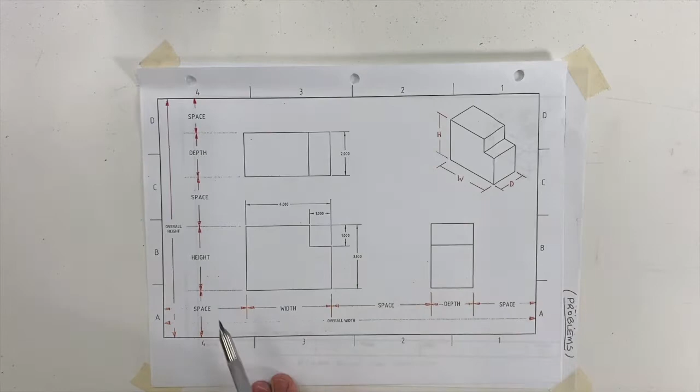To center a drawing, you first have to think about the overall size of this drawing, and then how it's going to be oriented in an orthographic or multi-view drawing. Remember, we have the front view, the right side view, and the top view. So we have to consider its width and depth in horizontal orientation, and its height and depth in vertical orientation or spacing. There's also a space on the left, in between the views, and to the right, as well as a space below, in the middle, and to the top. So it's first good to understand what size of a drawing space you have to work within.

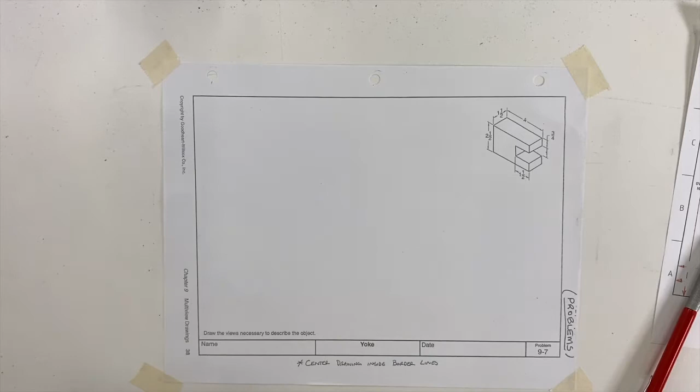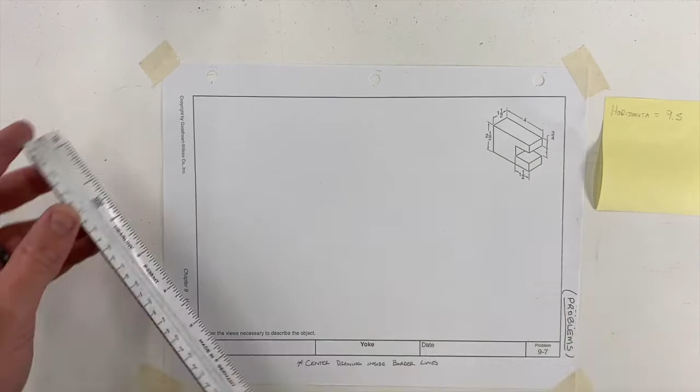Take a measurement, that way you can subtract the remainder to figure out what you have to work with. So we have 9 5/8, I'm going to round to 9 1/2. So our horizontal is 9.5. Our vertical space, we're looking at between the border lines, so basically the space we have to draw within, is 6 1/2.

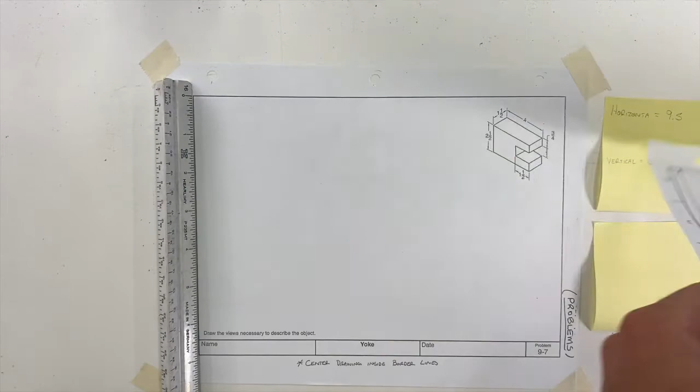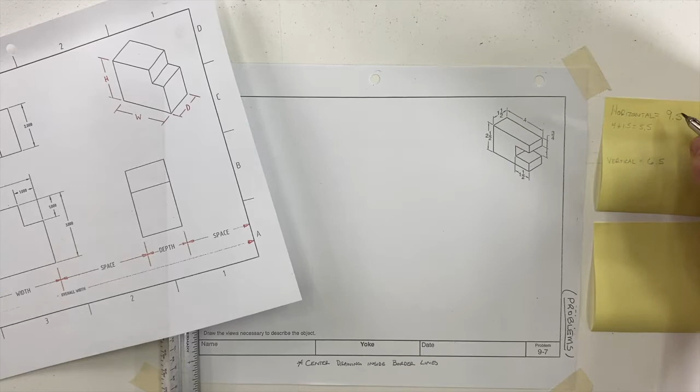Then we have to consider what the space is that we are working with in either orientation or direction. We take the width and the depth and add them together to understand what we're dealing with for the horizontal. The width of our object is 4, plus the depth, which is 1.5, giving us 5.5. So we subtract 5.5 from the 9.5. The halves cancel each other out, and we're left with 4 inches.

We're going to do the same thing for vertical. We're dealing with the height of the object and the depth of the object. So we take the height, which is 2.5, we add the depth, which is 1.5, giving us 4. So we subtract 4 from 6.5, and we're left with 2.5.

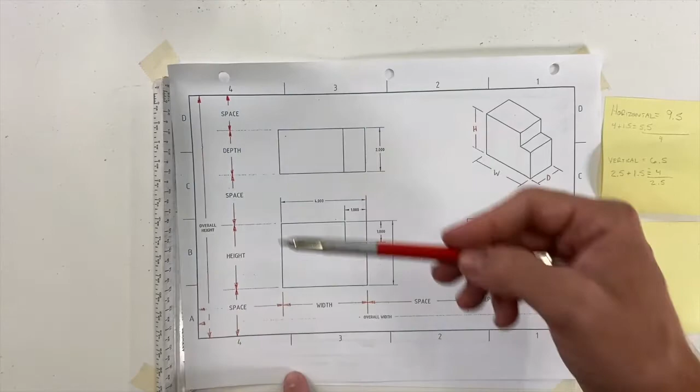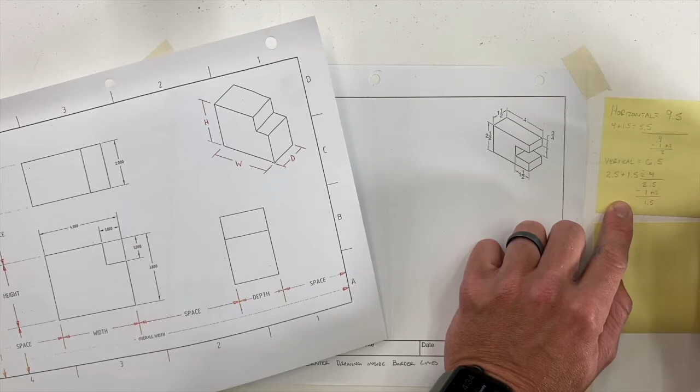These remainders are going to be divvied up with the spaces. I'm going to make this easy and just make the middle space 1 inch. So subtract that 1 inch, we'll call that the middle space, and we are left with a remainder of 3 inches for the horizontal distance, and we're left with 1.5 for the vertical. So this is going to be a 1, and this is going to be a 1.

The remainder is then divided by 2, for the top and the bottom, and the left and the right. So I'm going to divide both of these by 2, and that will give me my spaces on either end. So this will be 1.5, and this will be 0.75.

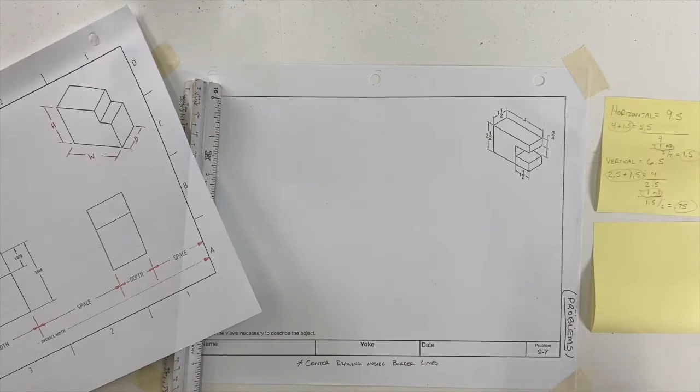So we have these two numbers. All the numbers that are important right now: the width of our object is 4, the height of our object is 2.5, and the depth of our object is 1.5. Now let's just talk about if we're laying out this thing in a horizontal format.

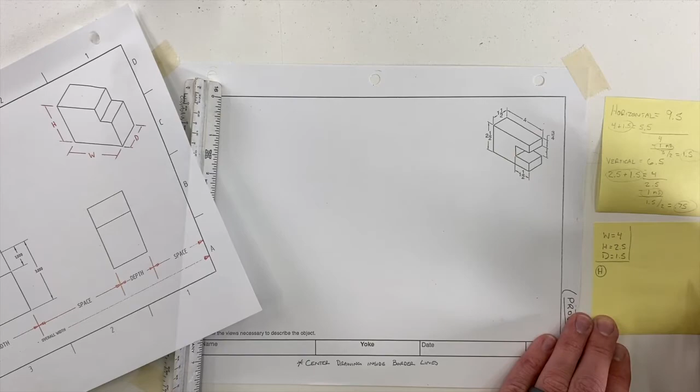So this is horizontal. We have the width, so let's break it down this way. We first have the space, which, looking at the horizontal spacing, my first space is going to be 1.5. Then I have this width, which is 4. Then I have the middle space, which I said let's make easy and make it 1. Then we have the depth, which is 1.5. And then we have the last space again, which should be symmetrical, so it's another 1.5. If you tally that up, it should equal this horizontal spacing, which it does, 9.5.

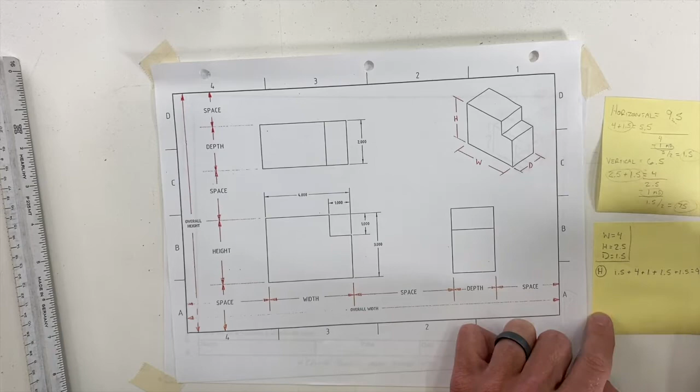Alright, so now let's do the vertical. We're dealing with the first space, the height, the middle space, the depth, and the other space on the top. So first, the space we decided, or that we found by subtraction and division, is 0.75. Then we add the height, which is 2.5.

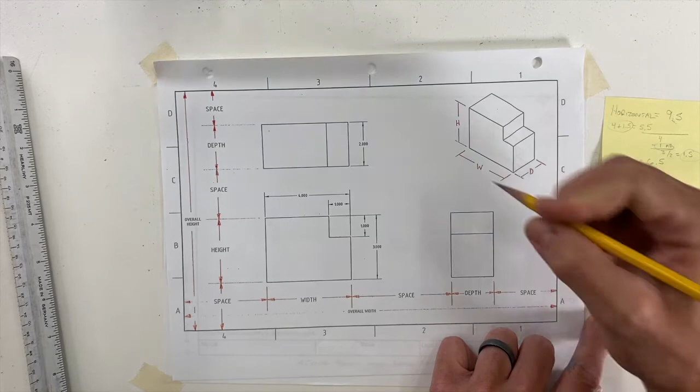Then we add the middle space, which is 1. Then we're looking at the depth, which is 1.5. And then the top space, which again is 0.75, and that should equal our vertical space right here, 6.5. So that's an easy way to check our work.

So when laying out our drawing, just like so, I know exactly where everything should be. So I'm going to treat this as if it were just a cube. We can ignore the little cutout for now, and we'll just lay out what's called the envelope.

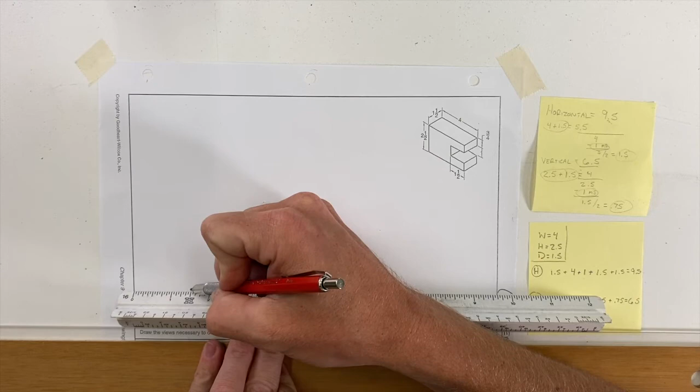All right, so first, just horizontal spacing. I'm just going to give myself some tick marks. First is 1.5. Then our object is 4, we can see it here, 4 inches. Then we have that 1 inch space. And then we have the depth, which is 1.5. And then we have the right side, which is 1.5, which adds up. You'll notice it's an eighth off because I rounded the 9 and 5/8.

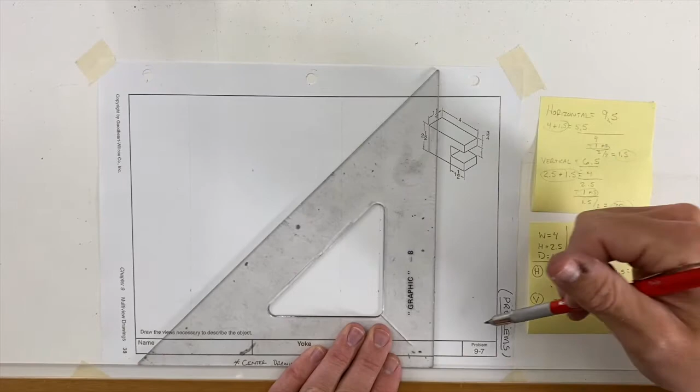All right, so from here, I can block in my vertical measurements. Now we need to measure our vertical spacing. So first we have a 0.75, then we have 2.5 for the height, then we have a 1 inch space, just jump to 3.5, and the depth, 1.5. And we should be left with the top space, which is 0.75.

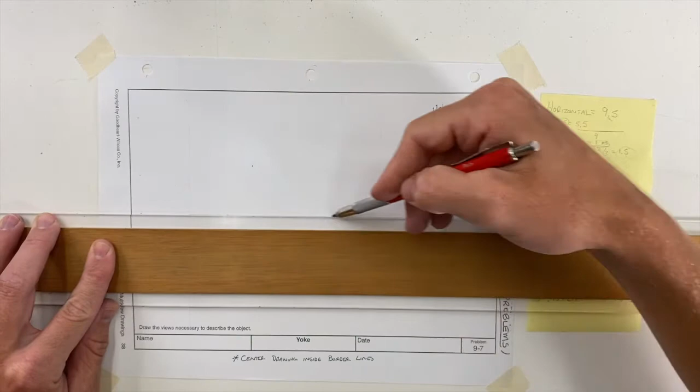So now I can just block in all the horizontal lines. And the reason I'm not drawing across the whole sheet is because now that I know where the horizontal lines go, I basically get 3 blocks here. So my front view, right side view, top view. And now I can start actually drawing this out.

So if I want to draw them as object lines instead of just construction lines, I could actually start this. I'm going to avoid that cutout again, that detail, just so you can see this and it shows up in the video.

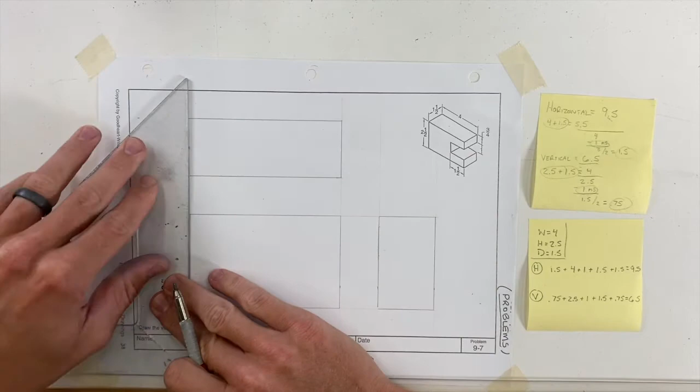Alright, so front, top, right. Now, to deal with this, I know the measurements are right here. So, from this side, it comes in 1.5. Mark that. And I can give myself a construction line.

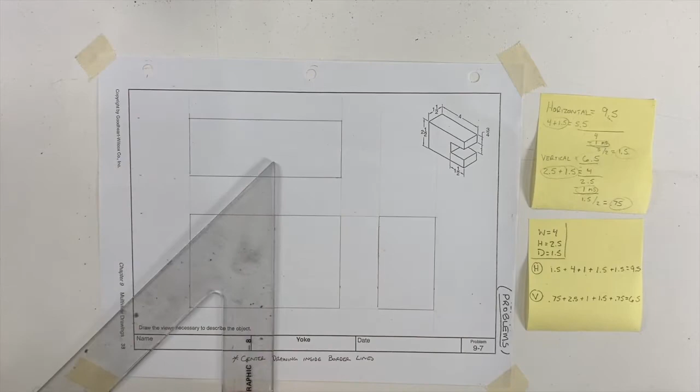And I'm going to approach this in front view because I can see all of the details in front view, and then I can project that information to the other 2 views. So if I give myself a construction line, I know that this notch comes into this line. Now I need the height of that notch and its location.

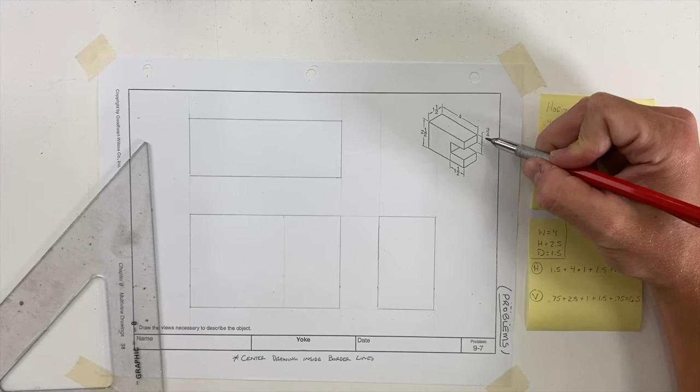The height of the notch, it's basically a 1 inch gap, but it's 3/4 off the top surface. So I'm going to put my ruler at the top. I'm measuring 3/4, and then I'm going to measure the opening, which is 1 inch. And I don't really need to know this because that's just the remainder, which if you do the math or measure it, it should be 3/4.

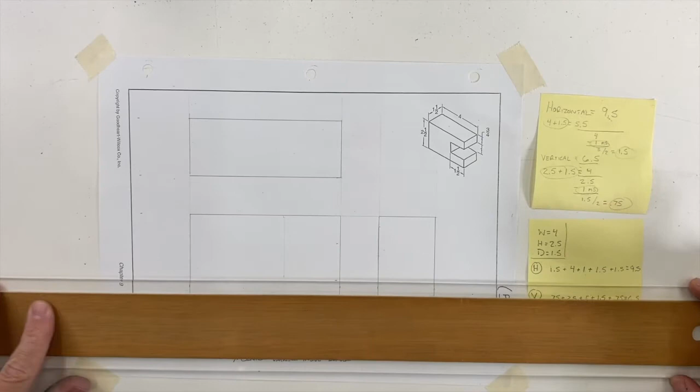So now I can draw my horizontal lines, and I'm only going to draw them where I know they're going to be, to this first construction line. Now I can darken the construction line only where it's supposed to be an object line, which is right here at this back surface, because this is all one continuous plane.

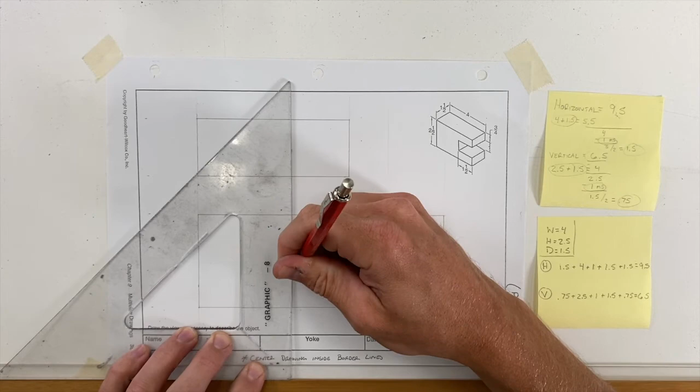While I have my triangle here, I can project this up. Do I see that corner in the top view? No. So that will, I know, is going to be a hidden line. It goes the whole way from front to back, so I know it's going to start at the front surface, and be a dashed line all the way to the back edge.

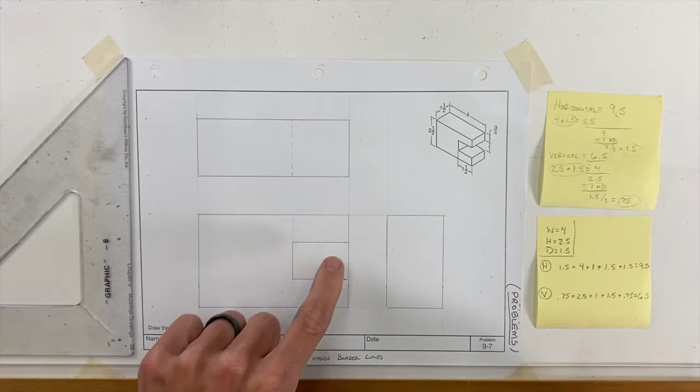I do need to fix this. This is open right here, and it's not an object line. So I need to erase this, or else it will be wrong. And it would be very confusing for somebody to make, because what that communicates is this is a recess, and there's an edge here, and really there's nothing there.

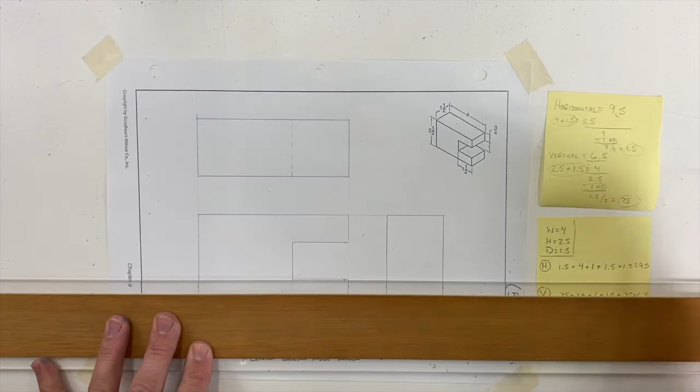So now I can transfer this information over, and this height from this view, I'd actually see this as a little rectangle. So it's just going to go straight from left to right. And same for that top edge. It is a visible edge, so it is an object line.

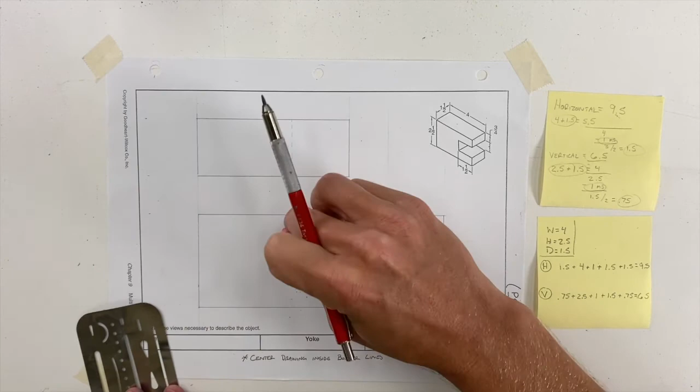Last step is to look over everything, make sure I didn't forget anything else, and then clean up construction lines and object lines. At the very end, you would put your name here with 1/8 inch stenciled uppercase letters.